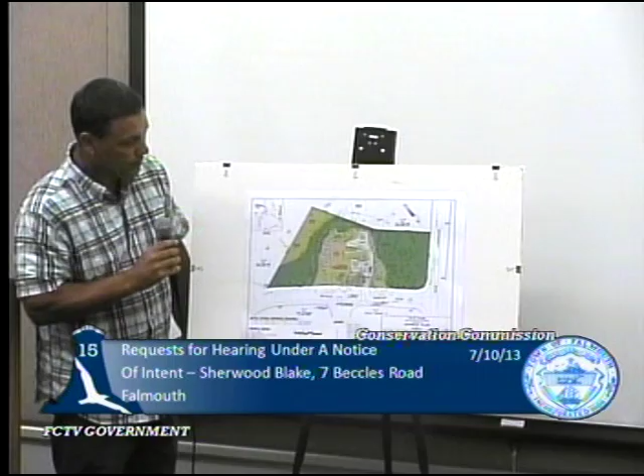We've submitted a notice of intent application for permission to repair two failing septic systems on the property at 7 Beccles Road. 7 Beccles Road is at the corner of Sippewissett and Beccles Road. The lot contains a single-family dwelling and all the typical appurtenances you'd expect with a single-family dwelling, including landscaping, a driveway, patios, things of that nature.

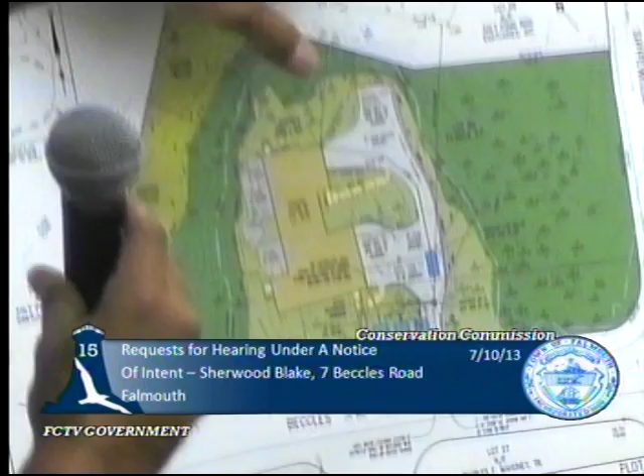It sits on the center of the lot, on the highest elevation on the property. Off to the east and north is a bordering vegetated wetland that was delineated by Vaccaro Environmental Consultants. There's a sloping landform around the property that meets the definition of a coastal bank. We've delineated the top of the coastal bank on the plan as well.

The property is under agreement for sale. A septic inspection was performed, and it was discovered that the property is served by two septic systems, both of which are in hydraulic failure.

The first one is located in the position that I'm pointing to here with my finger, and it's a cesspool. It's basically located about 20 feet from the top of the coastal bank and about 40 to 45 feet from the BVW. And it serves a portion of the plumbing within the house.

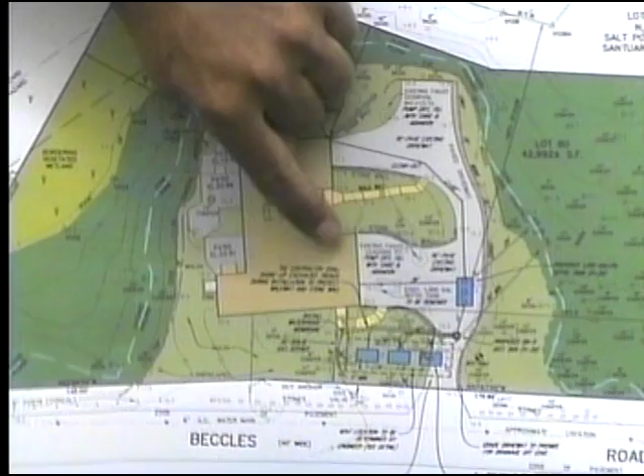The other septic system that is also in hydraulic failure is under the driveway in this location, and it serves the balance of the plumbing in the house. It consists of a 1,000-gallon septic tank and a leaching pit that's in hydraulic failure. The tank is undersized by today's standards - the minimum size is 1,500 gallons. Only a portion of the flow actually goes to the septic tank; the rest goes to the cesspool.

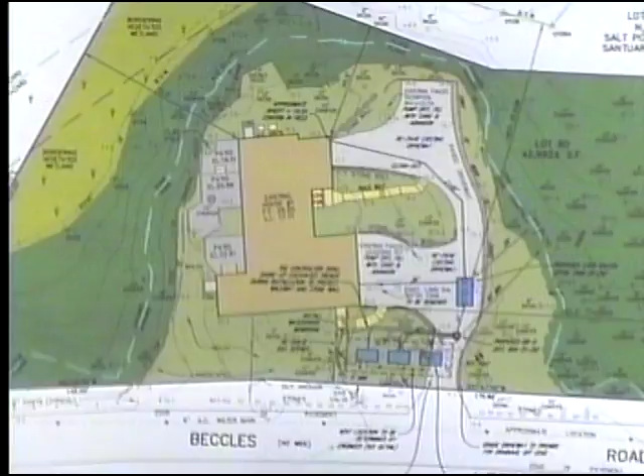Typically you would see a septic upgrade under an RDA application because it's something that I think the Conservation Commission would welcome getting repaired. There's no proposed alterations or improvements to the house. There's no proposed increase in septic systems.

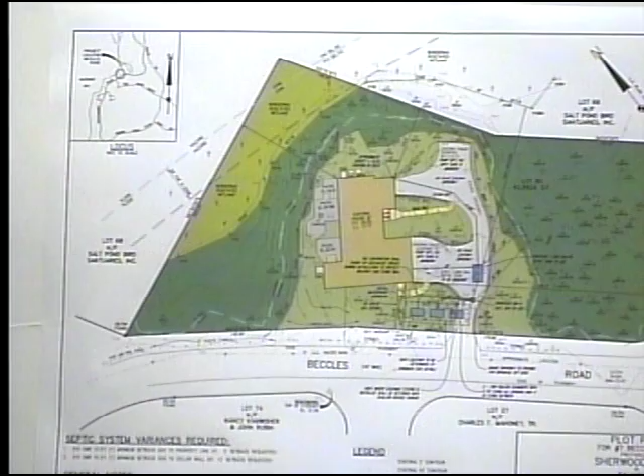The reason we filed for a notice of intent is because we went on site with Mark Hasbisick, your agent, and we talked about the close proximity to wetlands and the fact that the driveway will have to be dug up and repaved, and there seemed to be enough work close to a wetland resource that conditioning is probably appropriate. So a decision was made to file a notice of intent instead of an RDA.

So the proposed work includes abandoning these systems in place, pumping them dry and filling them with sand. The pipe that leads to the cesspool will have to be rerouted, and the idea is to excavate a trench down the driveway over to a place where a new septic tank will be installed, in a location that makes sense with the plumbing that exits the house here.

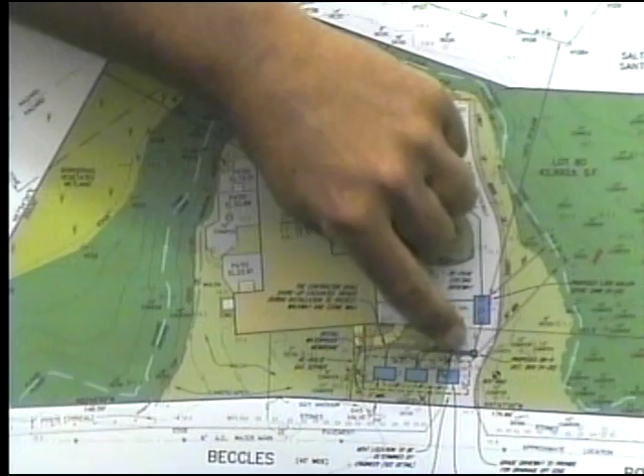So the two pipes that now go to separate systems will be piped together into a common septic tank, then piped to a distribution box, and then piped to a leaching field. The leaching field has been placed as far as possible from the wetland resources. In this case, the closest point of the leaching field to the top of the coastal bank is 50 feet.

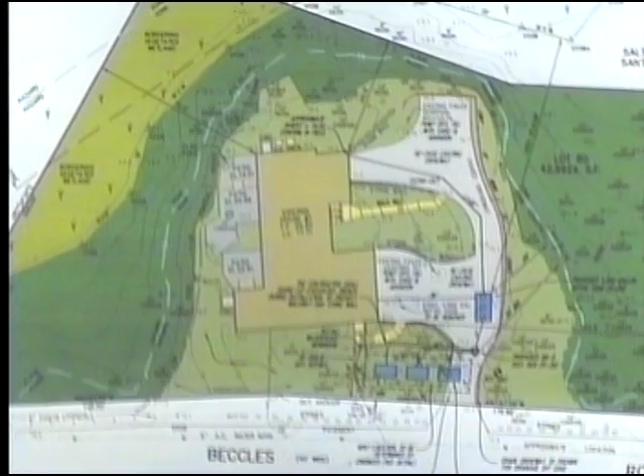There's virtually no other place on the site to put this that would really increase that setback. So there'll be some minor excavation and then repaving to install these components. There's some landscaping features between the house and the road that will have to be removed and then replanted after this is installed. We've put a note on the plan that says the landscaping shall be appropriate for landscaping over a septic system, with shallow-rooted plant materials.

So we're pretty much up against it here without a lot of options, but certainly this is an improvement over what's there today, with both systems in failure, and certainly the cesspool being very close to the wetland and the coastal bank here, and this leaching pit being closer to the wetland than what we're proposing.

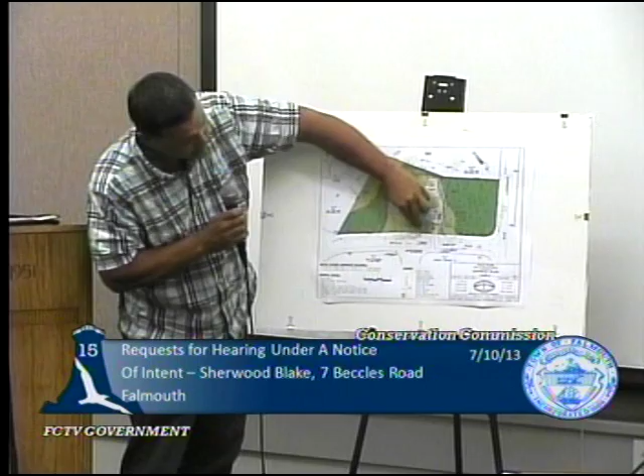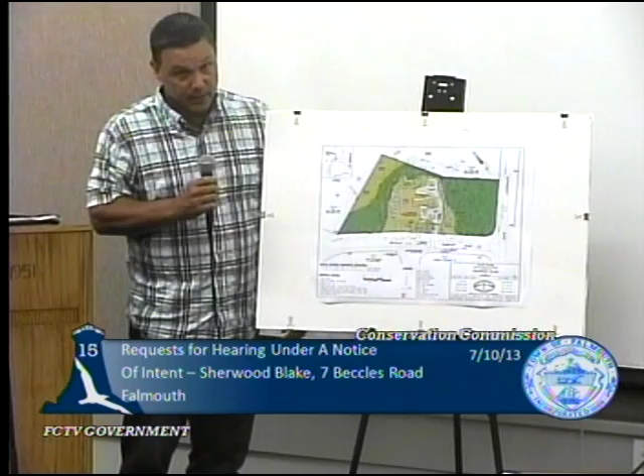The only other thing I'd like to add is we have been to the Board of Health. We submitted the plan, and we need a couple of variances: one from the setback to the street and one from the setback to the house. Both of those were granted, voted and approved. We haven't received a written document, but they had a meeting a week ago Monday and voted to approve it. With that, I'll be happy to answer questions.

Thanks, Mike. Jen? Yes, Madam Chairman. Mike, two questions, well, one comment, one question.

One request: BVW data sheets. I'm tired of hearing myself ask for them, so anytime there's a BVW project, just submit the data sheets as part of the application. I thought they were submitted. I thought we submitted them after the fact. I thought you asked for them when we submitted. Didn't get them. Just resubmit them, because I'm happy to do that.

And you say we went to the Board of Health, because I pulled the assessor's records on this and it says it's a 3-bedroom. So if you have any documentation, because you're proposing a 5-bedroom system, but the assessor's records have it as a 3-bedroom house. So our regs would call that an enlargement of the system, which means you would have to overcome the presumptions of significance.

Sure, I can speak to that. Well, next time provide some information if you can. I'll speak to it tonight.

We discovered that discrepancy. We did a walkthrough with the health agent, well before we developed the plan, because we found the same discrepancy. The health agent walked through the house with us and agreed that the system should be designed for a 5-bedroom, based on the number of bedrooms that were in the house.

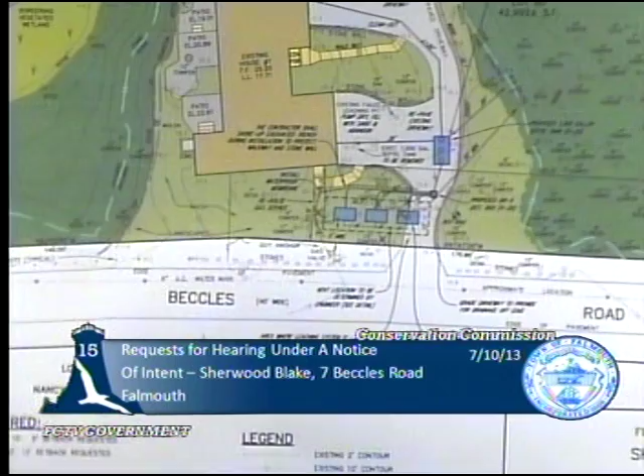I think once this is all done, it's gonna be better. My only concern, and probably theirs too, is that they're gonna lose all those beautiful pine trees in front, and you can't replace them. There's a couple you're keeping, I see. We did our best. We're hoping the dogwood on the end that was showing to be removed - we're gonna try to save it. No, it's a cherry I think. Mature cherry, we're gonna try to save it, but the pines, there's no way around it - the taproot on the pine, you couldn't possibly put it on top of that.

Mike, when you come back, can you give us a plant list of what you're proposing to put over that leach field? I will do my best. The buyer has very specific ideas about how he wants to replant that, so we're going to have to coordinate with him and maybe get you a plan that shows that. Oh, that's fine. To have a continuance? Yeah, but we don't have a date yet, so let's discuss that first.

A date - Mike, how long do you think you'll need? When do you file this with Natural Heritage? The 25th, same day for us. Let me see when that's gonna kick out. I don't know that we will hear from them. Yeah, that's what I was thinking - we could put you on for next week, because it seems like we could try for it, but I don't know if we'll hear from MESA. We'll try to call them and pressure them to respond. MESA has until like the week of the 22nd.

Not the 31st? Oh, sure. If you want to try next week, Mike, we can put you on if you can get me that information. Why don't we try - if it comes through, it'll be quick, and if we don't have it, I'll just request a continuance until the 31st. That's fine, because you're not meeting on the 24th. Correct, that's fine with me.

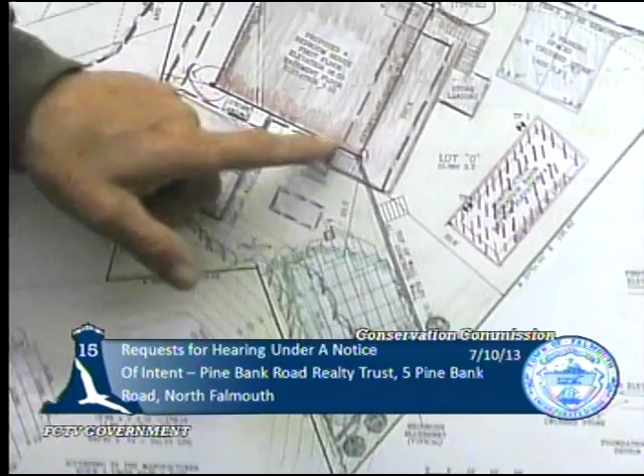The original footprint, shown as a brown dashed line, is in this location with the deck. We are shifting it so it now complies with zoning. Instead of being 4.7 feet from the sideline, we are now going to be 11.4 feet. So we are literally taking the house, knocking it down, but putting the replacement approximately 5.5 feet further east.

We're doing so for a number of reasons. One is compliance, two is so they can have a little more privacy here. Those really are the major reasons. If you look at our notes, you'll see the actual proposed lot coverage is reduced by 0.4%.

However, in order to build this house and get it to comply with Title V present-day standards, we had to propose an elevated system in the back. What we intend to do is raze the existing house, remove it, and rebuild in the same location.

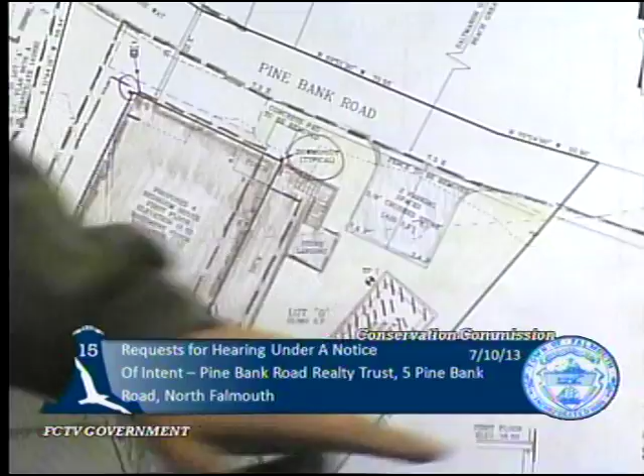We officially show 2 parking spaces when they already park here, but we're depicting 2 here, and we're actually proposing to put 2 more there. This isn't included in our calculations because we're proposing 3/8-inch crushed stone surfaces to be placed on a permeable sub-base and base.

If you've been to this area during a rainstorm, you'll know there's a lot of standing water. So what we've done is tried something a little more unique. When they remove the house, because of the way the foundation's going to have to be built, there's a couple things — one, we proposed a detention area so that if there is pumping, they have a place to pump it.

That detention area is only going to be about 2.5 feet deep because that's how deep it is to the groundwater, so we're going to excavate it out. It's going to be temporary in nature. At this moment, we don't know exactly how the architect proposes to place the foundation, but I anticipate he's going to have to do some dewatering, so we designated a dewatering area. I took the liberty of showing that area because I'm not sure how they're going to accomplish that.

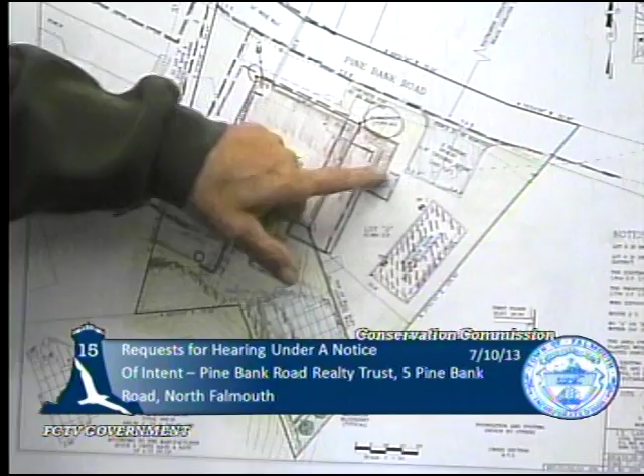In terms of improvements, the house is going to be shifted 5 feet. It's going to have a new landing for the deck and another set of stairs here. We have to do that because it also has to be elevated, being in a flood zone.

The flood zone, I don't show it on this plan, but it is staked in the field. It is flood zone elevation 15, so we had to make the first floor at least 1 foot higher, elevation 16, because of your regulations, and we added a half a foot more, so it's at 16.5.

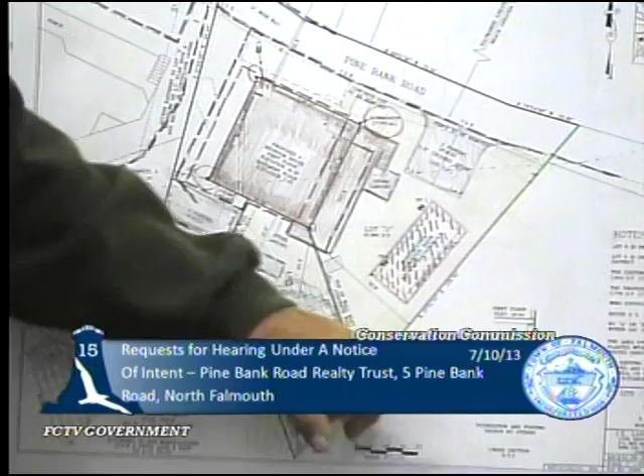Getting back to the drainage, what we propose to do is show conductor pipes at each corner, and the slab elevation is proposed to be at 7.5. We actually have a crushed base put below the slab, so the crushed base is going to be at an elevation of about 6 to 7, and then there'll be anywhere from 4 inches to a 6-inch slab, which brings us up to 7.5. So we're going to drain all the dry wells into that crushed stone base.

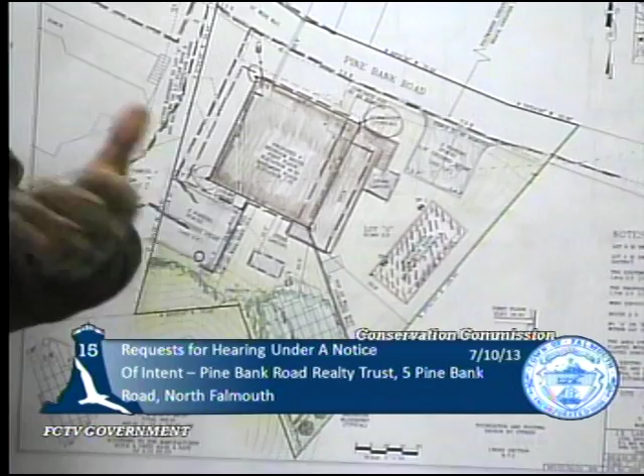It's porous. We have a granular soil, and because we have elevated groundwater, at about elevation 5, we really don't have any place to put a deep basin because we'd be in the groundwater. So what we intend to do is remove any organic material, go down to the coarse granular sands that we encountered, and fill it back with either crushed stone or a sand and crushed stone combination. The dry wells will be directed to underneath the house.

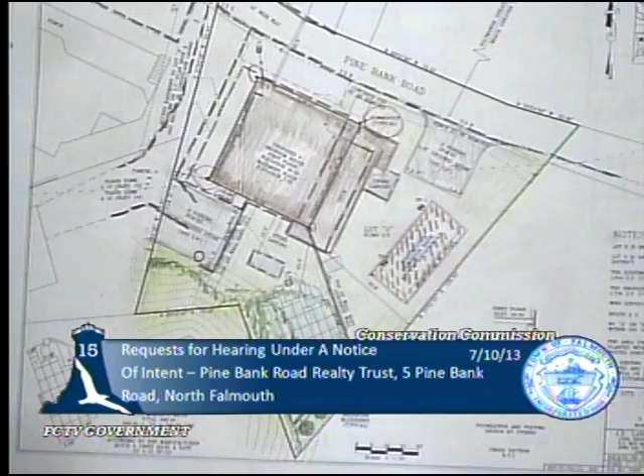Very much like you might see on many parking lots, where they actually have chambers below the parking surface to contain either the first flush or the increase in volume of material leaving the site because of the man-made improvements.

I probably skipped over the most important part, and that is the resource areas. We're greater than 300 feet away from any vegetated resource area. In fact, I think the only regulation that triggers us coming here is we're in land subject to coastal storm flowage, and we're near a coastal bank.

However, this is almost an opposite scenario. I've never seen anything quite like it. The top of the coastal bank is back here on someone else's property. We're virtually working below the top of the coastal bank for this entire project. Because of the site and the elevation of the groundwater, we are actually proposing the SAS be placed at the toe of the bank.

Because the groundwater is so high, we've proposed a retaining wall to retain the SAS. The way we've designed it, we don't need any variances from the Board of Health. We're 5 feet above the groundwater. We're greater than 10 feet from the property line. It's all gravity flow, but as a courtesy, we are taking it to the board for commentary. We don't believe there's any requirement. Because the house is so high, it's going to be gravity flow to the tank, then to the field.

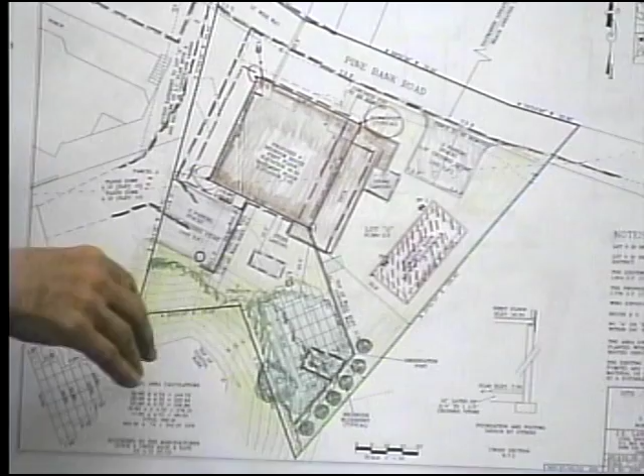And the reason we embedded it into the bank - do you have finished grades done? Do I not see finished grades on there? Well, it shows the top of the proposed wall at 11.5. So that's your finished grade. The actual ground is around elevation 7 to 8. So you're going to have a wall somewhere between this high and this high, depending - if you're at elevation 7, it'll be this high, if you're at elevation 8, it'll be a foot lower.

So you're proposing to raise that grade all through from the end of the stone wall where your high bush blueberry are to the concrete wall near those parking spaces, and raise that grade 3 to 4 feet in that entire area? Yeah.

We feel we're gonna need fill calcs for that, Jack. I realize that. I know what you're looking for. I just didn't provide them. That's a lot of fill. It's like the BBW sheets - every time you're filling, we're gonna ask. We'd rather have you provide it, rather than us having to ask.

I completely understand. We do like the fact that you provided the basin for the dewatering, although when it comes down to the construction of this, we're gonna need a much more detailed dewatering plan from your contractor prior to going forward. Yeah, that'll be a condition. You don't need to understand that now.

This was rather dynamic. The architect is, I think, still a little bit behind on that, but we had actually talked to the contractor, and the contractor spoke to the architect about different foundation designs, because I was toying with the idea of pile-driven, which would require dewatering. I was thinking that too. But there's so many issues the architect has to reconcile. So I took the worst case and said we're going to dewater. So you're proposing some sort of foundation right now and not piles?

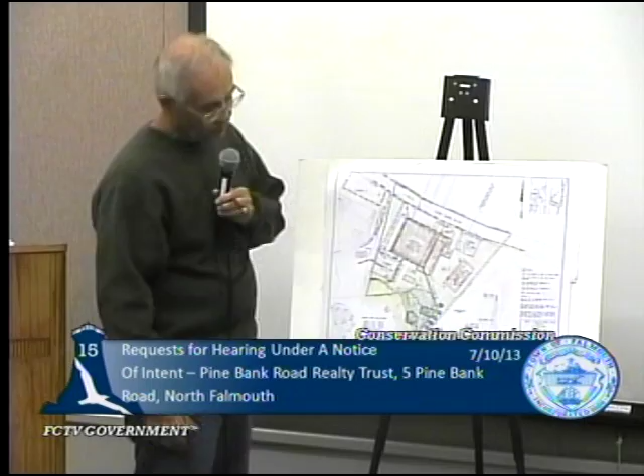Under the entire footprint, there's going to be a foundation system, and the architect's going to integrate it with a concrete slab that ties it in. Directly below the concrete slab, we intended to put a 1-foot thick layer of crushed stone. That is going to be where the water goes from the roof runoff, instead of directly onto the ground where it's highly organic and it'll sit there. We're hoping there'll be a more direct discharge into the groundwater underneath the foundation. Not hoping, it will happen.

Hopefully that clarifies that issue. One more time, Jack, I understand what you're saying, but I think there are a couple of people who have had more experience with that, and we'll see what they think about that.

So what you're telling me is you're gonna put it into the dry well, and the dry well is gonna filter it underneath your foundation? That's correct. That's just what he wanted to make sure I heard correctly. That's correct.

Mike. Would you like to wait? Oh, wait, okay. No one looks... oh, Courtney, a volunteer.

Are you gonna have a structural engineer confirm the stone design and everything underneath there? Because that's a little puzzling, but yes. It kind of runs counterintuitive. Typically, you wanna get the water away from under foundations, for stability purposes. I understand what you're saying.

The bottom of the foundation's still going to be 3 feet below where that crushed stone drainage area will be. They're going to actually have to build the foundation, fill it, then put a crushed stone base, then put the slab down. But I understand what you're saying, Courtney.

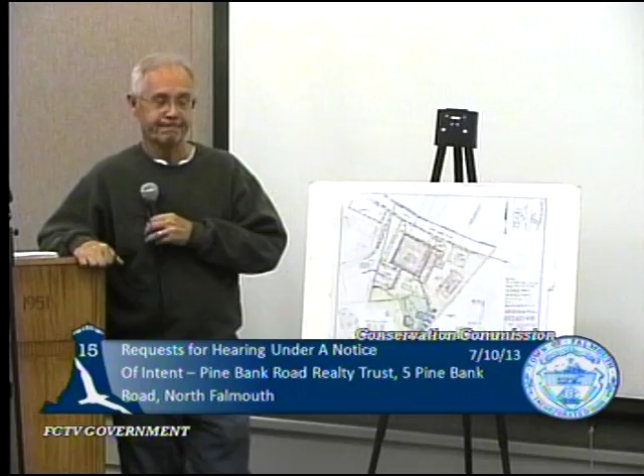We estimated a 40% void ratio with the crushed stone. I can go back and take a look at that, but that's why I chose 1 foot. That's going to be for the engineers, that's the technical end of it. If it doesn't work, it's not my problem. And we really didn't have an effective solution.

You have groundwater 2 feet down. Exactly, and so what do you do? You either let it go across the ground, which upsets everyone because you have puddles there, or you try to do the best you can. In this case, we're creating a waffle of crushed stone that has perforated pipe going through it in order to contain or direct the water directly underneath the house and into the groundwater. Let's get Michelle's thoughts on this. I got it now, I think.

So if something goes wrong and it's below the house, it just doesn't seem like a great idea. Well, the structural stability of the house is not in question because the bottom of the foundation is still 3 feet below that, and that's the structural support of the dwelling.

And I've had experience with this on other basins that are undersized, and what happens is the leader pipe is generally relieved because it's about 1 to 2 inches higher than the actual downspout, the collector system. So if it fails, it bubbles over basically on top of the ground.

What about frost heave issues? Are you worried about water in frozen conditions and high groundwater? Well, typically you want to be a little deeper. High groundwater is about elevation 5, because mean high water is 3.5. And I actually encountered water at about elevation 4.5, and we assumed it's going to be at 5. So we're already pretty high. And the roads, some portions of that road are only at elevation 6.8, so it's a very, very low area, extremely low area.

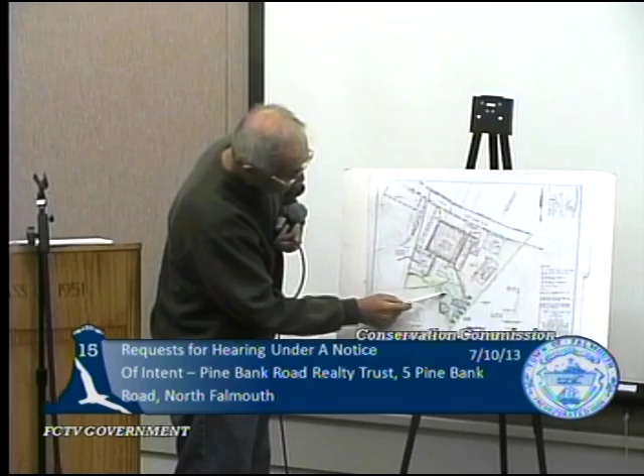So I wanted to show you it's here because it is outside the footprint of the SAS. And here's the existing shed, and it's about 11 feet off that shed. I think when they first saw it, they thought it was on the other person's property because it's a highly irregular shaped lot on the backside. But there is a 14-inch oak, a good sized tree, and it's intended to stay there.

The neighbors that I encountered - because I don't live in that neighborhood, so the stranger was addressed - everybody said hello to me too. They were more than happy to greet me and welcome me to North Falmouth.

Looking at the architectural drawing, at the back of the garage and such, your wall that is going to be integrated into the septic system - I'm just not quite clear on where the foundation pieces are. Is this going to be a monolithic pour? Is that wall literally going to be part of the foundation of the house, or is it going to be separate from it? If you're going to answer, you're going to have to come up.

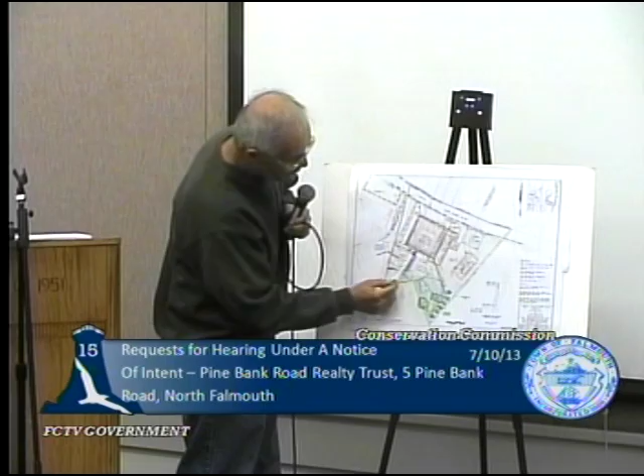First of all, Tom, are we talking about this wall right in here? Yes. Okay, this wall is going to be part of the structure for the house. It's also good because we're greater than 10 feet away, it complies with Title V - doesn't need a vinyl membrane.

I'm looking at this and I wasn't really clear - it's very defined for the SAS on the back, but this is looking to have a traditional foundation. He wants to know how that diagonal is going to tie into those right there. That's the structural engineer's problem - you're going to have steps on all the foundation, different elevations in the foundation itself.

Going back to answer someone's concern, part of the Title V submission requirements is we show the details. We came to an agreement before this meeting that the architectural, structural details have to be provided to me in the next week and a half so I can go to the Board of Health.

But our second page - would you be so kind as to give them to us? Give us a copy as well. Sure, I don't have a problem with that. It's a requirement of Title V, so it's got to be submitted, and I just felt that architecturally, the architect should be responsible for that wall design.

I had a little note here as well - the old pit that's in the backyard, that's going to end up getting yanked out of there, I would imagine. Yeah, that's right, because instead of being abandoned there, it's got to be moved. There's gonna be so much activity, you're gonna be close to footing areas and all that, so I would imagine that just has to come out.

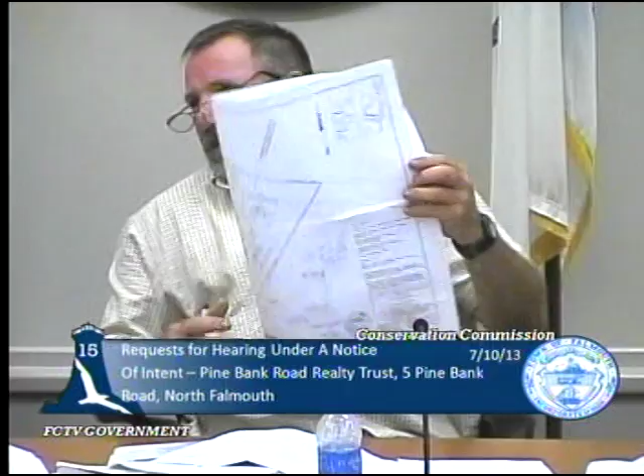And then I got a giggle on this - it says 'what upland side for spoils?' Somewhere on here I read spoils will be stored in the upland. I'm like, what upland? I had a little chuckle, I had to let you know you made me laugh. There is no upland - not on site.

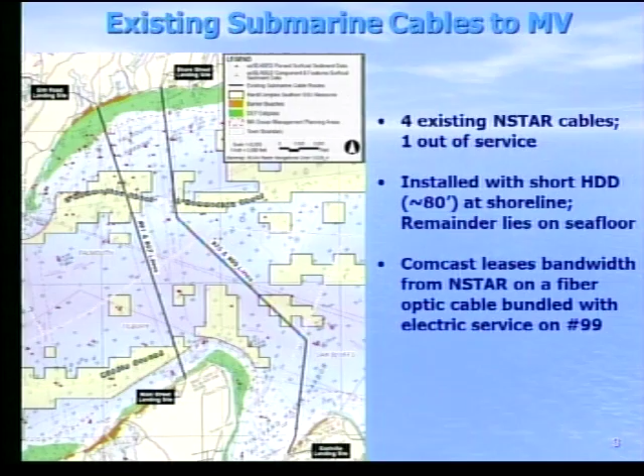Comcast currently leases bandwidth from NSTAR on cable 99, right here. This started out as a Comcast project, and I'll explain how NSTAR got involved later on.

In terms of cable history, cable 75 on the east side has failed and is not operational now. Cable 99 has failed 4 times in the last 15 years. Cable 91 has failed 5 times. Cable 97 is the only one that hasn't failed. So we have a problem here with these failures. Comcast needs to have some redundancy in their fiber connection to Martha's Vineyard, and NSTAR needs to replace the service that was provided by Cable 75 with that outage.

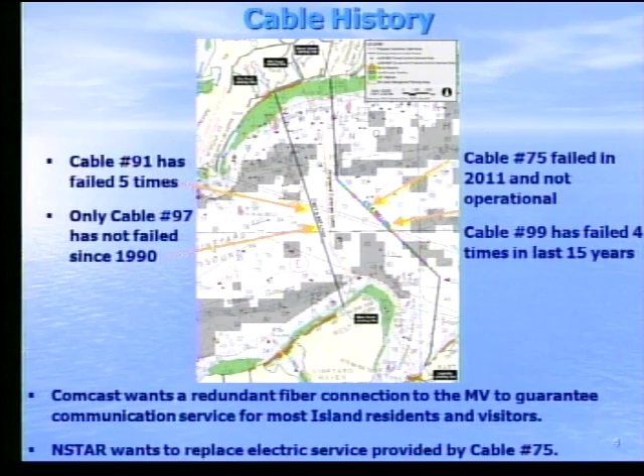The cable route that we selected is right up the middle, from Mill Road going across, avoiding what are known as SSU resources - sensitive, unique resources under the new ocean management plan. For cables, that includes eelgrass, which is the green swath up there along your shoreline, and those pixelated areas identified as hard complex bottom by the ocean management plan. You can see we selected a route that goes through the hole in the hard complex bottom and also down the southern end.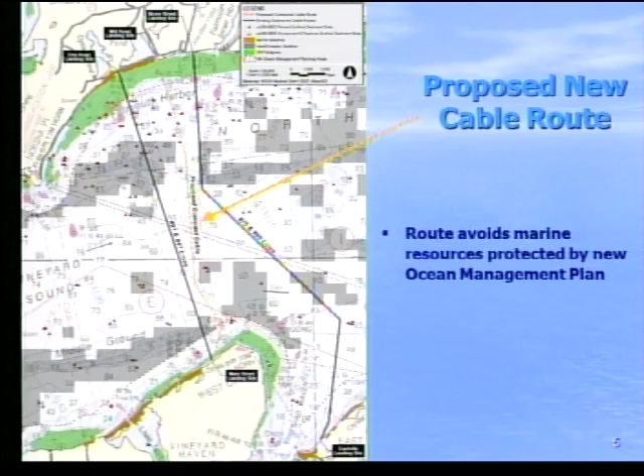The state agencies wanted us to show that hole actually existed, that it wasn't just a relic of their limited data collection. So we did a reconnaissance survey back in May of 2011, a day-long survey of bathymetry, side-scan sonar, and video transects, evaluating the route for potential SSUs, the hard complex bottom, and the eelgrass. We confirmed that the route avoids those resources.

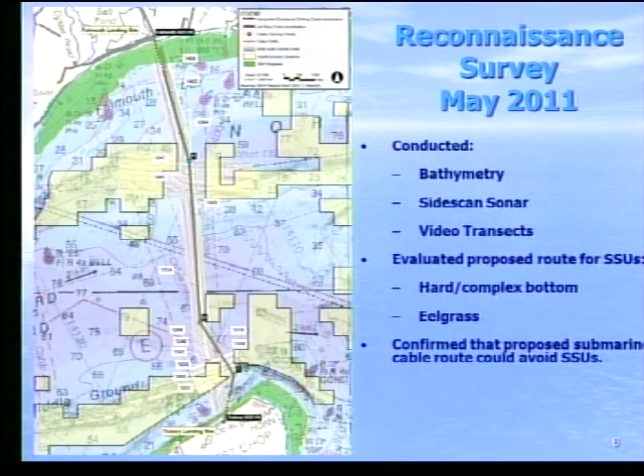The state agencies said fine, go ahead with your next phase of the project, which was basically filing an expanded notification form with MEPA. They agreed with our request to do a single EIR, and requested that we continue to work with the state ocean team on a data collection analysis for the project.

So we put together a very detailed sampling plan involving about a week's worth of survey, doing a 600-foot wide swath - you can see the swath here - with multi-beam bathymetry, multi-beam side-scan sonar, sub-bottom profiling, and magnetometer survey.

In terms of the bathymetry, the multi-beam looks like this image here. It takes the data and processes it into this bathymetry map with a huge number of data points, providing a three-dimensional view of the bottom rather than a single track like a typical bathymetry map. It's a very precise look at the bottom - probably some of the best bathymetry that exists in Massachusetts.

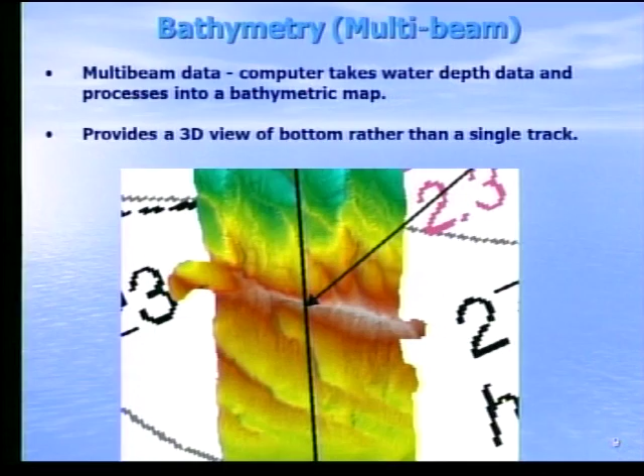Side-scan sonar takes a look at the bottom three-dimensionally. It sends out an image to the side of the ship - the ship is right in the middle here, and it goes out in this direction and this direction, so you see what's on the bottom. We can see the existing cables shown there, a field of sand waves on the bottom, and anomalies on the bottom. We're looking for things like archaeological resources and hazards that the cable might encounter.

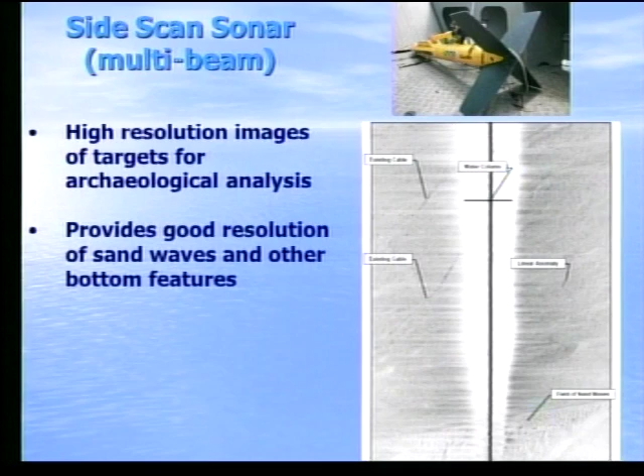We also did sub-bottom profiling, and this is a shot over one of the sand ridges that we go across, with some very active sand movement on a couple of ridges out in Vineyard Sound. You have 5-knot currents out there, so it's very active in terms of sediment transport.

So we can also look at archaeological features that might be buried beneath the surface, presence of hard bottom that might be a problem for our horizontal directional drilling, and basically the geological stratification, which tells us the history of the area. Very powerful information.

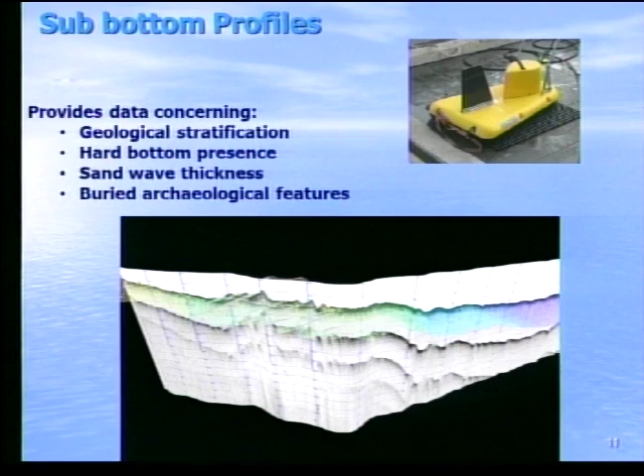We also did a magnetometer survey, which obviously looks at metal objects on the bottom, which is very important for marine archaeological resources.

Next, we did sediment sampling and video transects. You can see the 24 video transects are spaced across here, and then 17 sediment sample locations as well.

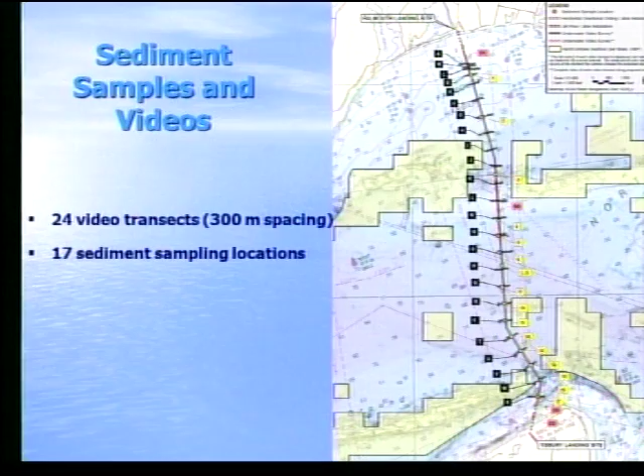What do we find? Underwater video, basically we use that to determine where the eelgrass is along the shoreline. As you probably know, eelgrass changes in location from year to year, so we wanted to pin it down very carefully. We also used it for other types of marine biological mapping and sediment characteristics.

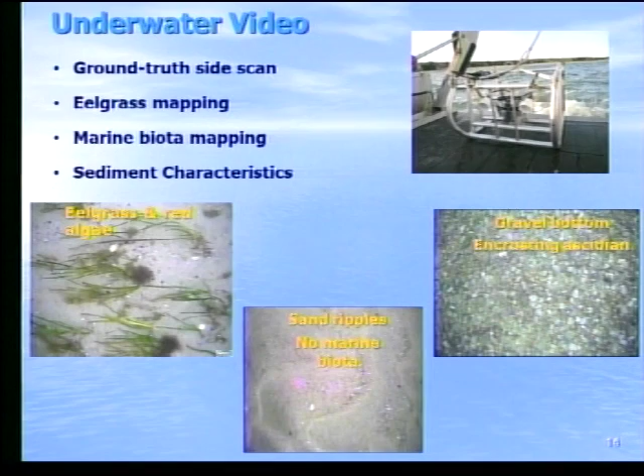We found over those areas that were identified as hard complex bottom, really these were sand waves, and there was really no marine biota over them. We found a lot of the bottom was a gravel bottom with encrusting ascidians, pretty homogeneous bottom, other than in those particular areas.

Sediment characteristics - we did some vibrocoring. Problem with the vibrocoring is the sediment is so compact, we actually bent 2 core barrels. So we did most of our sampling with a grab sampler shown there on the right-hand side. We found moderately well-sorted coarse sands, very well-sorted gravels, scattered cobbles occasionally, and then very well-sorted gravelly, very coarse sands.

We filed a single environmental impact report back in April of 2012 with MEPA. The Secretary found that we properly complied with MEPA, satisfied with 1 EIR.

Division of Marine Fisheries indicated that we don't have any time of year restrictions because of the long horizontal directional drills that we're doing. That's a very unique aspect of this project.

Natural Heritage said basically there were some plovers and least terns that nest over in the Vineyard side. However, since we're doing horizontal directional drilling under their resources, they have no concerns with the project. There won't be any impacts to that habitat.

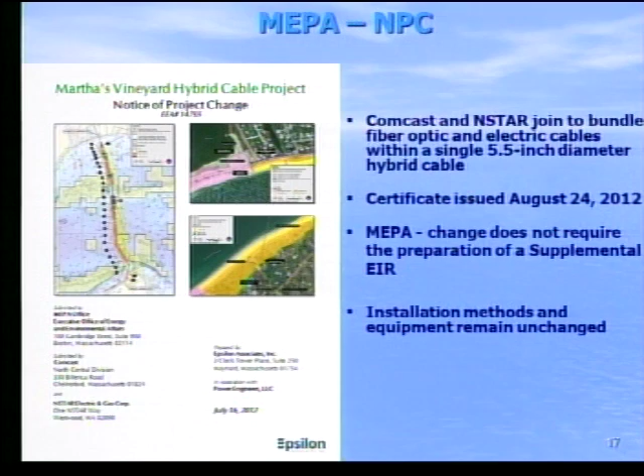Next, we put Comcast and NSTAR together into one single project. So we had to go back to MEPA and file a notice of project change, which we did back in July of 2012. MEPA basically found that it doesn't require the preparation of a supplemental EIR because the impacts and installation methods are pretty much the same.

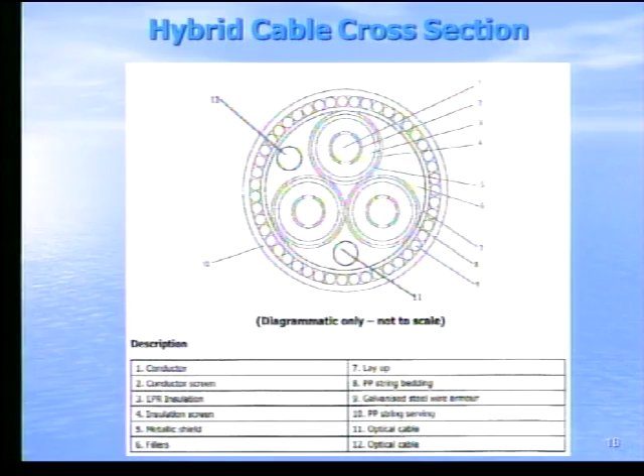So what does a cable look like? It's about a 5.5-inch diameter cable. It has 3 electrical conduits and 2 fiber conduits, and then the rest is basically to protect those conduits.

Okay, let's get to Falmouth. We're working at the town parking lot here, the corner of Mill Road and Surf Drive. We're going to be putting in a horizontal directional drill pit here.

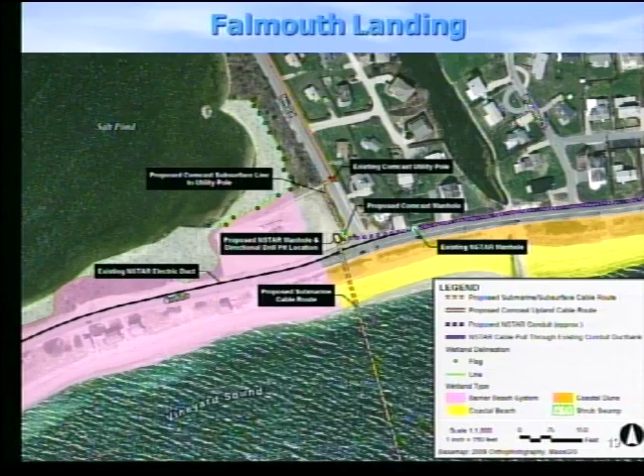We'll be connecting to a new pit that we create over here, a new manhole that we create for Comcast over here, and they will connect over to an existing riser pole on the other side of Mill Road. Then NSTAR will connect over to an existing NSTAR manhole that's basically part of the electric system along the north side of Surf Drive. So the only 2 things you'll see after the project goes in will be those 2 manholes.

Shoreline change - we looked at that in terms of resource analysis. Pretty stable shoreline. The presence of a groin has compartmentalized the shoreline. Not too much change here.

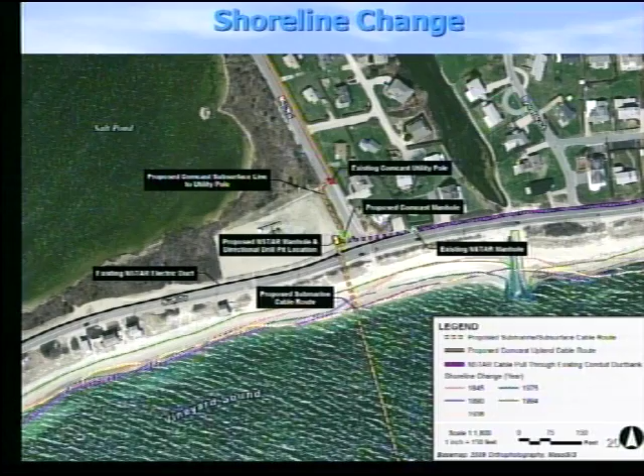You see, after the storms this past year, you see overwash. We didn't see any - little bit of wash over here right at the walkway. These dunes really kind of contained the ocean water during those storms. Most of the overwash occurred down here where some of the houses are on piles.

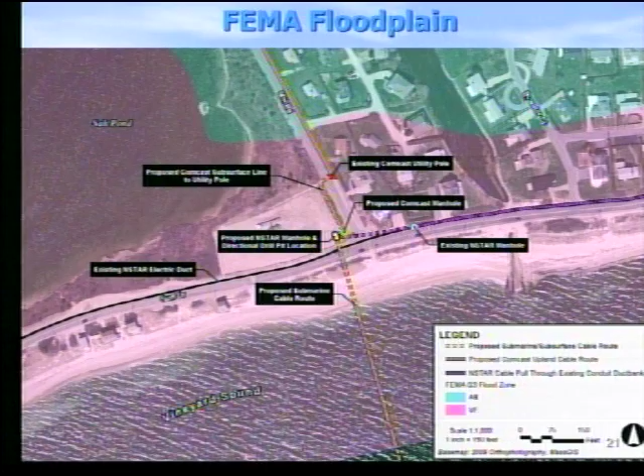We are in a floodplain, but we're not doing anything to harm the floodplain, nor will we be harmed by the floodplain. We have existing cables out there, as I mentioned.

Engineering plans. This kind of schematically shows where our plans are. This shows both a plan view, and you've already seen that schematically, of our horizontal directional drill pit. Shows also a cross-section view, where we're going out underneath the road, underneath the dune, underneath the beach, about 20 to 30 feet below the ocean bottom.

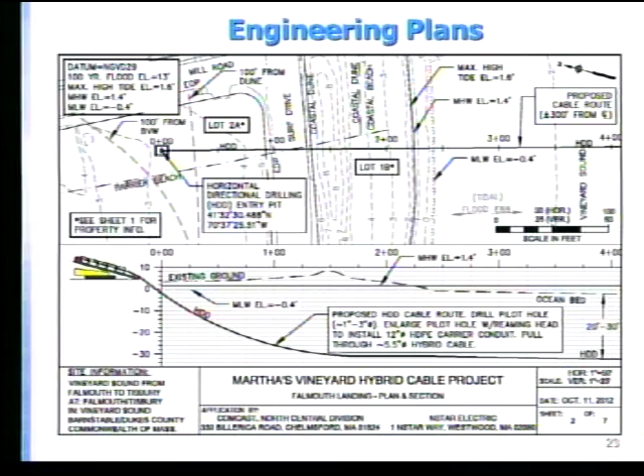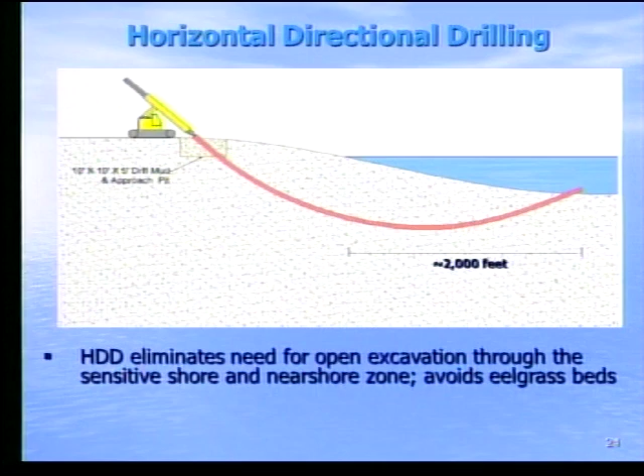Here's schematically what the horizontal directional drill looks like. Here's the pit, goes down like that. And here's schematically how it works. First you do a pilot hole, that's about a 1 to 3 inch pilot that gets drilled out.

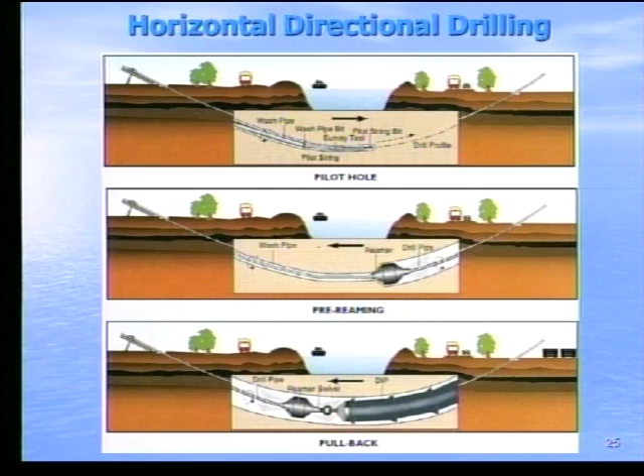Obviously we have ocean out here, we don't have another landmass. After the pilot is advanced, a reamer is put on the end of the string that's pulled back through the hole and enlarges it to the point where you can pull conduit through. We'll probably either have horizontal HDPE, high density polyethylene, or steel cable for our conduit.

Then once we're out here, the horizontal directional drill is out about a half mile, so we're avoiding all those coastal resources. Then we do trench and burial. Unlike the other cables that are out there that are spliced together, this is one single cable, 4.5 miles long, 300 tons.

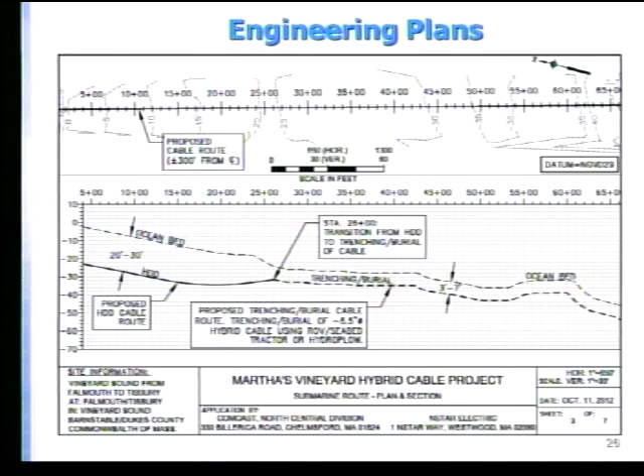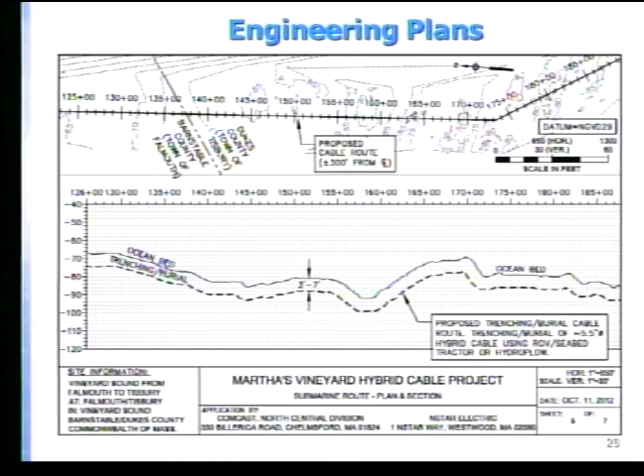We continue out, going underneath middle ground, and then we come out to the border of Falmouth with Tisbury right here, at 13,500 feet.

Okay, what happens in terms of the burial? We have a ship out there. It's going to be attached to a hydroplow, one technique that could be used, which simultaneously buries and lays the cable under the seafloor.

Or it could be harbor master units on a barge. Harbor master units are basically big outboards. They usually have them on both stern and bow of the barge, and they're controlled by something called a dynamic positioning system, basically a big computer that controls all four of those harbor master units.

And you need this out here because, again, we have 5-knot currents. The alternative for that is big anchors, what they call kedging along the bottom. The state agencies didn't want that because of more impact to the bottom, so we're going with this dynamic positioning system.

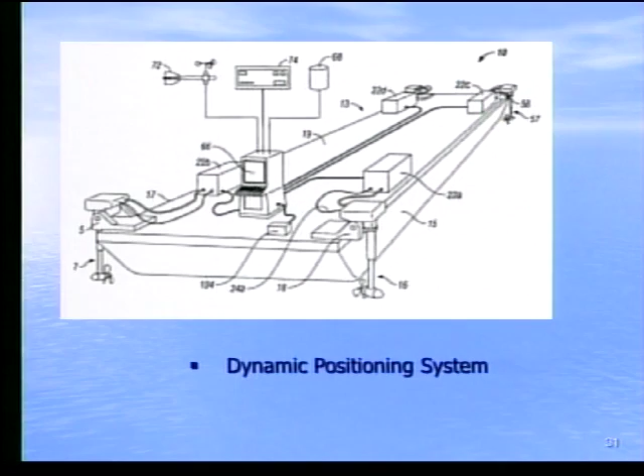Type of units for installing the cable would be a hydroplow that has a long unit on the bottom. These are all fluid injections, which inject water into the sediment, allowing the sediment to part and the cable to basically sink down into that hole that's created.

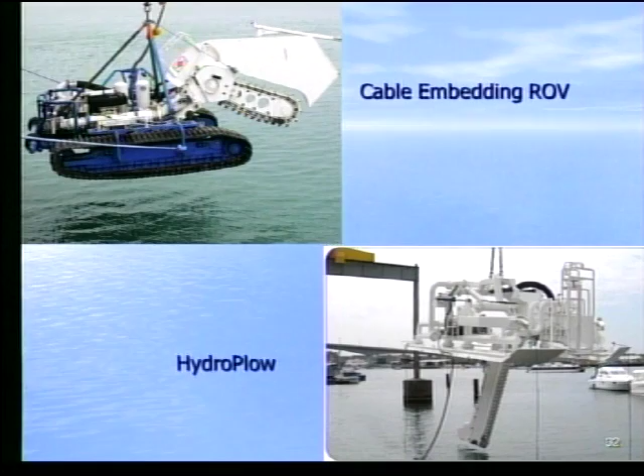Or through some of the coarse grain sediments, they have these units that look like a big chainsaw. It actually cuts through the coarser sediment.

Okay, over at the Falmouth landing, again, we talked about the directional drill pit. That will eventually become the NSTAR manhole. We talked about the Comcast manhole right here. Talked about trenching over, going under the road, connecting to the existing pole for the Comcast, and then going over to connect to the existing manhole for NSTAR.

In terms of the notes here, I mentioned the only two permanent ground-level changes will be the new manholes. Obviously talked about horizontal directional drilling to avoid impacts to the dune and beach. No new utility poles. In terms of other impacts, work lights will be shielded and equipment will have noise abatement measures. Drilling will take approximately 1 month, and construction will be conducted according to the town of Falmouth regulations governing construction hours.

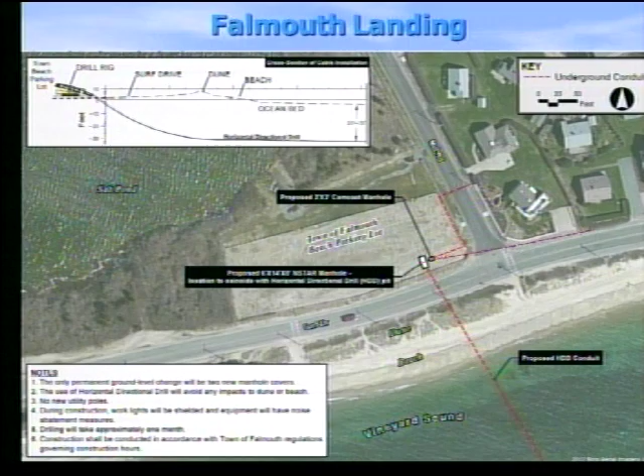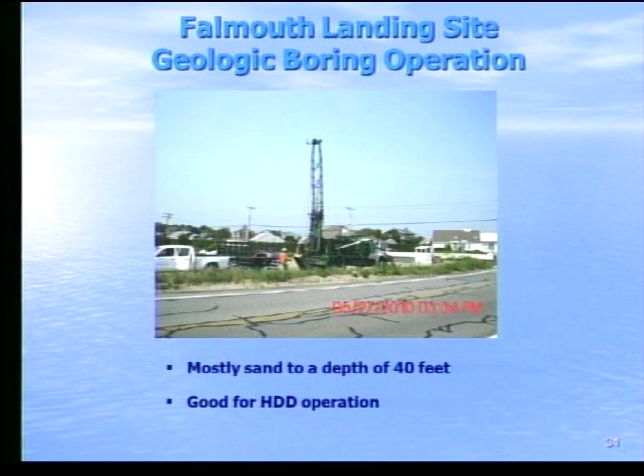Okay, we've already been before you with an RDA for the boring that was done. The boring found mostly sand to a depth of about 40 feet, which is good for the horizontal directional drilling. The drill mud, which sometimes is of concern, basically is used to bring back the cuttings. It's also used to lubricate and cool the drill head and seal and maintain the stability of the drill hole.

The mud is a bentonite, which is a montmorillonite clay. Clay expands up to 15 times. They're packed together as layers like this. When water is added, they expand. If you live down south, you know it, because a lot of the soils will expand down there. There aren't too many houses with basements because of the montmorillonite type of clays.

Also, there'll be polymers, which are basically a chemical compound that adds to the viscosity and lubricity of the mud. Polymers are used in ice cream, starches, cellulose, xanthan, and guar gums. Pretty benign stuff. And also water.

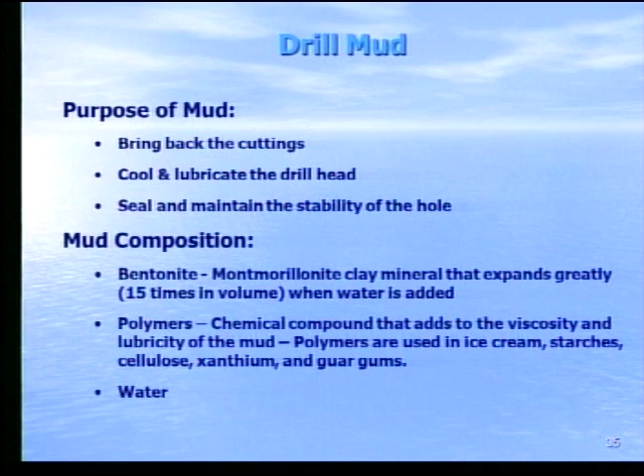I talked about minimizing impacts to the neighbors, the abatement measures that we already talked about. And that's pretty much it.

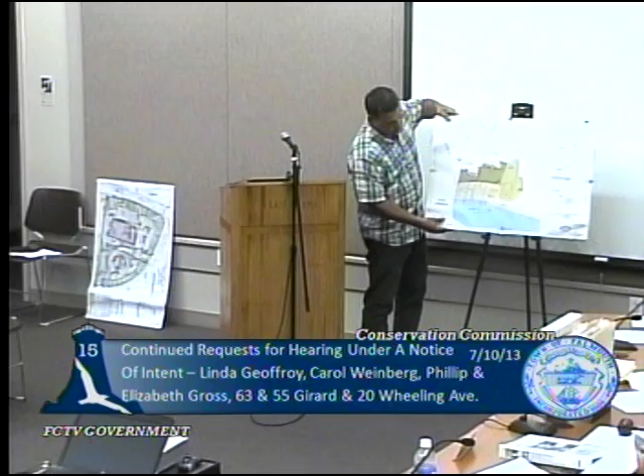We originally went through the project in fairly great detail. We listened to issues and comments raised by you, and made revisions to the plan subsequent to your comments and meeting with Jen. We submitted 12 copies of revised plans on July 2nd.

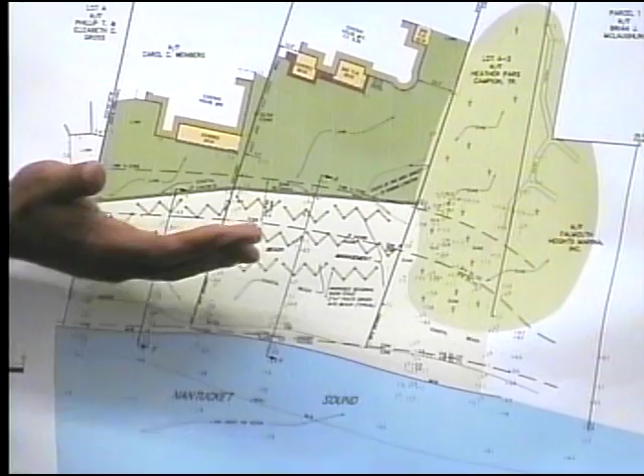The plan revisions we made specifically are: number 1, we removed the solid fencing that was proposed along and adjacent to the existing concrete wall, we completely eliminated it. We adjusted the spacing and configuration of the sawtooth snow fencing in 2 ways: by creating gaps in between that are staggered from row to row, and also by shifting them further landward away from the tidal zone, since there was some concern about possibly being affected by wave action and storms.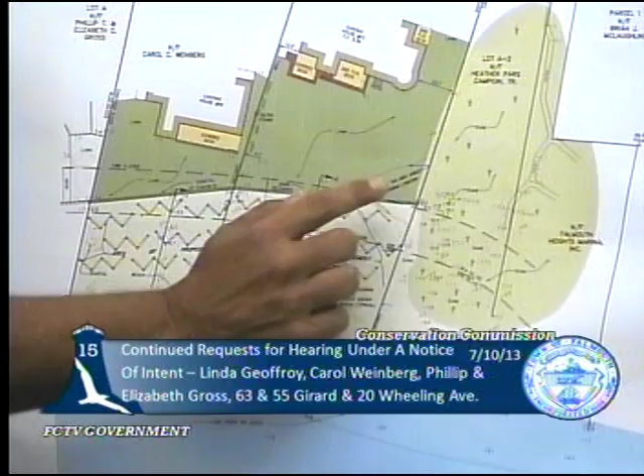We also modified and checked the area that we're calling the area under pending litigation, so that it very precisely matches with what the plan from 1992 showed as the boundary of an area designated as a dune. And that's all the changes.

I think that in the original hearing there were no other matters raised. Oh, there's one other one: we modified the notes on the plan so that all the spreading of the sand will be done by hand, there'll be no machinery needed to do it. I guess that's a pretty important one. So the general notes reflect that. Okay, we expect it to be a condition.

Okay, thanks Mike. Are there any questions? I guess, Michelle, you don't have... oh, I'm not on the quorum. You're not on the quorum. Jen, you had a question?

The only thing is, Mike, I'm glad you guys did everything I asked. I only asked that the snow fencing, and I remember talking to you and Brian, stay off that boundary until that whole thing is cleared up. Since it's still on the plan, we'll just condition that all the snow fencing stay at least 30 feet off that boundary, just till the litigation clears up and we see where we're at.

And the only other thing is that I know the Grosses are no longer a party to this. You and I had that discussion the other day, but they are going to come forward with the restoration of that dune, correct? Yes. Okay, excellent. Okay, any? No question. No.

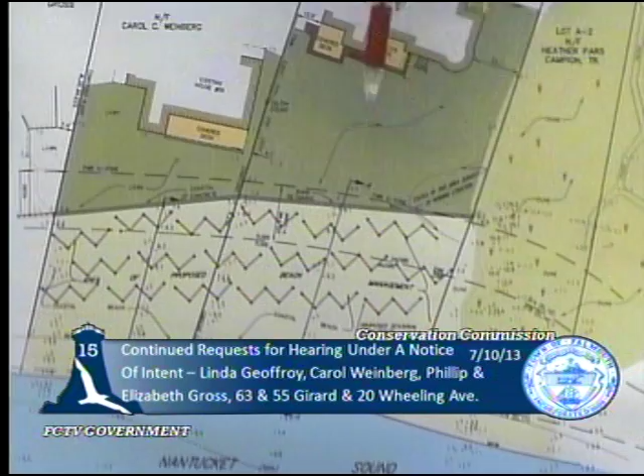And just to clarify, we didn't do that originally to deceive you. We only showed what we thought you were concerned about on the upper side of the wall. We didn't show the area on the other side, but we are concerned with that, and now it's fixed.

I think they've come a long way. I was really glad to see that solid fence taken out along the retaining wall, and so I'm okay with this. No questions.

Move to close and take it under advisement. Second? Okay, we have a motion and second to close the hearing and take it under advisement. Any questions on the board? Any questions from the audience? Okay, all in favor of the motion on the table, which is to close the hearing and take it under advisement, say aye. All opposed? Any abstention? Unanimous, so moved. Thanks, Mike.

Estate of Angeline Caruso, care of Eugene Caruso, executor, 191 Edgewater Drive West, East Falmouth, for permission to construct a new three-bedroom single-family house with attached deck, AC units, to install a Title V sewage disposal system, driveway utilities, native mitigation plantings, and the associated clearing, excavating, grading, and landscaping. Request for a variance under FWR 10.13 from the performance standards set out in FWR 10.185A1A and FWR 10.185A3E.

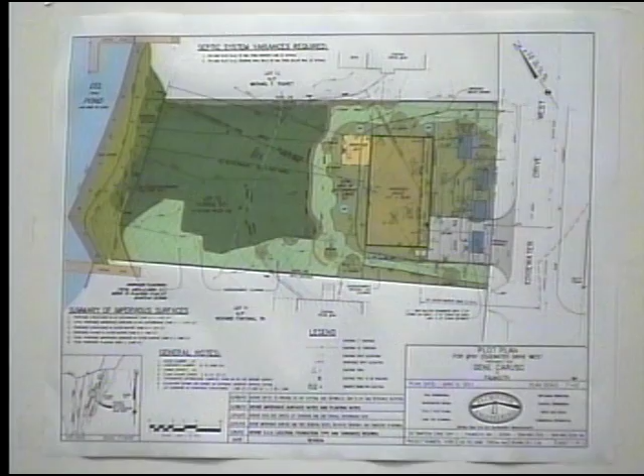And the final, but probably most significant plan change is a change from a traditional Title V septic system to a nitrogen reduction septic system. That change came about based on some additional information that was requested to be submitted to the record that we then read. I think it was Chairman Gladfelder who had requested that the DEP estuary study for the south-facing coastal ponds be submitted into the record.

It's a lengthy document, but we read through it, and within the document, the theme is loud and clear that these ponds are suffering from excess nitrogen loading, and it comes in three basic forms. I think we're all probably familiar with it: fertilizer, road runoff, and septic systems, or substandard septic systems.

So we discussed it with our client and made a recommendation that we could further improve our application if we offered to provide a nitrogen reduction septic system as part of the Title V septic system, to further convince you of how we're doing everything we can to mitigate against your concerns. So this plan now includes a nitrogen reduction septic system.

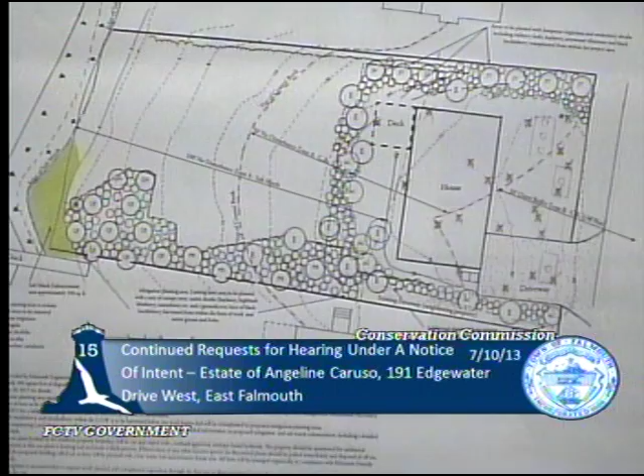So that's up in here and around the house, to improve the buffer zone and wildlife habitat value. So that's just a general overview. I'm happy to answer any questions about the planting plan.

Okay, thanks. That's it for your presentation?

I wanted to say something about the variance. I won't be long, but I think what I have to say is important to our client. The last time we were here, I presented the variance request, and it's in writing, it's in the record—it's about a 7-page long letter, and I would ask that you take a look at that. I'm not going to go through the letter again tonight, but I'd like to highlight a couple of points, and I've got a new argument that I'd like to assert tonight that I didn't assert last time.

The highlights of the variance request—and the Commission's well versed in this—you have to have a hardship to be eligible to apply. And if you can demonstrate a hardship, then there are 5 criteria that need to be met. In the letter, and in my presentation last time, it went through the hardship and the 5 criteria. I'd like to highlight some of the points that I think are important.

Number 1, we submitted aerial photos and some photos taken from an abutter that demonstrate that the lot at issue was altered legally before the adoption of the wetlands bylaw. In particular, much of the alteration was done very close to the salt marsh and to Eel Pond. Our proposal is to replant and restore those areas with the mitigation plantings that Teresa spoke about.

Secondly, we're proposing to restore the degraded salt marsh and add 120 square feet. We believe that the restoration of the salt marsh and the buffer adjacent to it will provide integrity and improve the function of your wetland resource areas. The mitigation planting proposed on the bank will improve the stability of the bank.

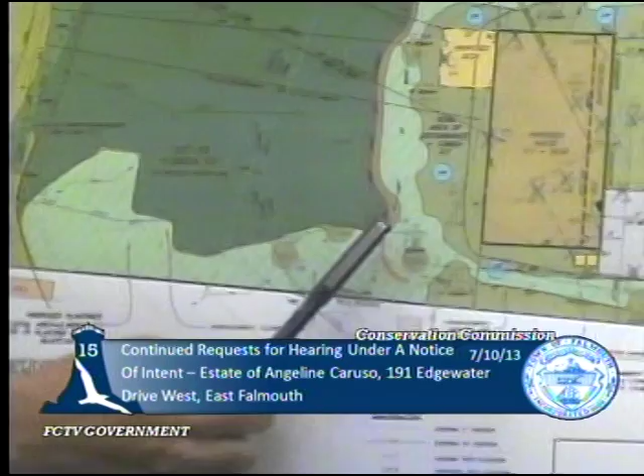So if you refer to your plan, you can see where the wetlands are delineated, the coastal bank and the salt marsh. And then there are the no disturbance zones from the 1018, which is the problem for our client. In particular, I would refer you to this V-shaped line here, which represents the 50-foot no disturbance zone from the coastal bank.

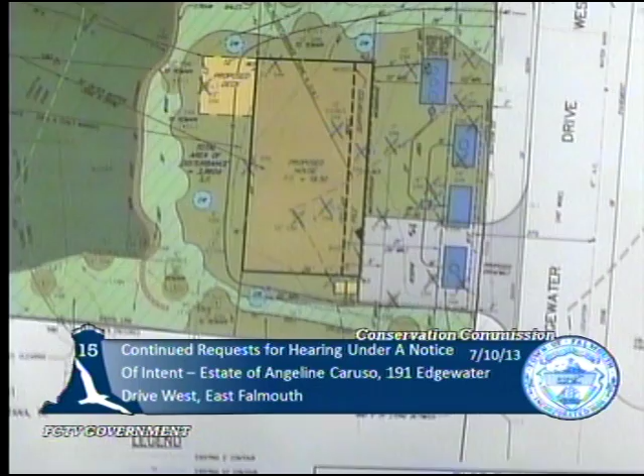This part of the house is in the no disturbance zone. If the applicant attempted to literally comply with 1018, the only area that is outside the no disturbance zone is the inside of this V right here.

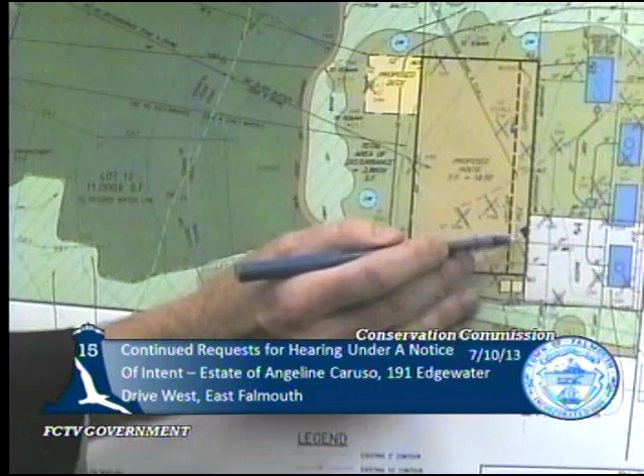The commission has a policy of requiring a setback from the 50-foot when there's a structure. I was here a week or two ago with another project, and the commission made it very, very clear that you wanted to see 5 to 10 feet for a limit of work. If we add 5 to 10 feet onto these lines, the area that could be developed with a structure in compliance with your regulations is this black dot right here, right at the tip of my pen. It's 2.5 square feet.

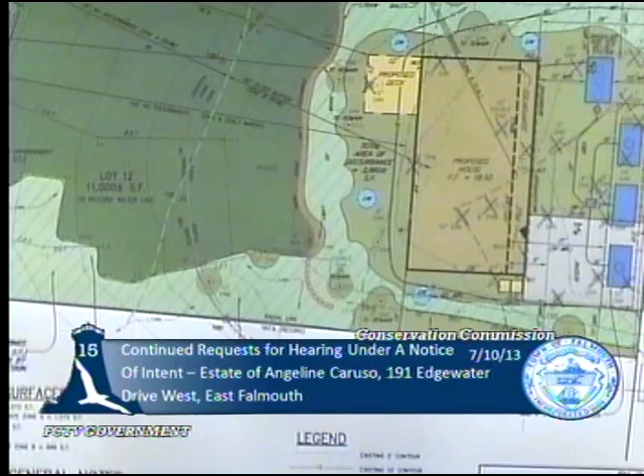That, of course, takes into account the zoning setbacks that are applicable. The structure's 25 feet back from the road and 10 feet from the side lot line.

So again, let me go back to your definition of hardship. When the literal application of the wetlands bylaw to a piece of property, this lot, owing to its unique characteristics, is unduly oppressive, arbitrary, confiscatory, or causes a substantial economic loss, is a hardship. And so our argument is very straightforward.

Application of 1018 allows this person to build a 2.5 square foot structure. That is a substantial economic loss given the background facts, which I talked about the last time, which are as follows. The lot is zoned for single-family development.

It complies with zoning and is eligible for a building permit. It has been owned by the applicant and his parents since 1966, which is 46 years. It's been assessed by the town all of that time as a buildable lot. The taxes have been paid as if it were a buildable lot.

It's currently assessed for $407,000. We're all members of society. I don't think any one of us would pay $400,000 if you could build a 2.5 square foot structure. So we would submit to you that the literal application of the regulation in this case precludes construction of a reasonable single-family home.

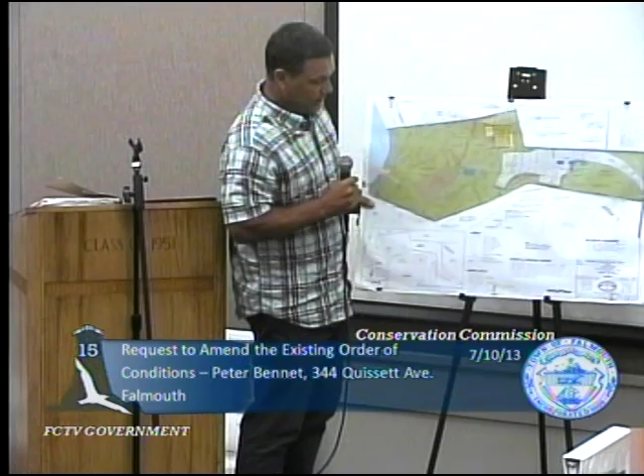The house and existing accessory structure have considerable age, decades, and the applicant applied for and got your permission to raze the existing accessory structure, which was a garage with sleeping quarters on the second story, and rebuild it in basically a similar location. That application also included removal of some pavement and reconfiguration of some parking.

This application does virtually the same thing. There was also a proposal to upgrade the septic system, which was an older cesspool system, and change it to include a pump, pumping up to a leaching field that's outside your jurisdiction, whereas the existing septic system is in your jurisdiction. So we got the order of conditions.

Then there was another regulatory body to go to, the Zoning Board of Appeals. The reason we went to them is because the structure was pre-existing and non-conforming, and by technicality was in a front yard. An accessory structure in a front yard requires review by the Zoning Board of Appeals.

They had some concerns that were sufficient enough that we wanted to reconsider our options, and make it so that while it's still an accessory structure, it's not in a front yard. Bob Ahmet represented the applicant, and Bob and myself went and met with the building commissioner, and a determination was made that if the accessory structure is put in this location, it's not in a front yard.

So you may ask yourself, what's the difference between here and here? The front yard is determined to be an extension of the front face of the building on the street side. So the house in this location is not forward of that extension of the front face of the building. We have an opinion from Eladio Gore where he agrees with that, so that changes the review process.

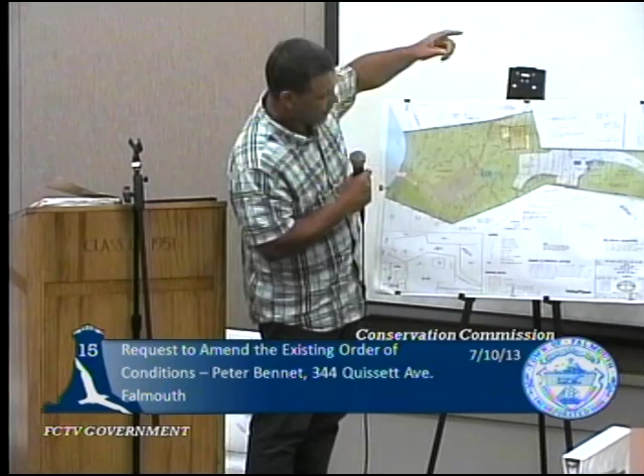There are 2 trees that have to be removed, and they're actually in the outer buffer zone, barely. We're proposing instead to mitigate for those 2 trees by planting, I believe, 6 new eastern red cedars on the property.

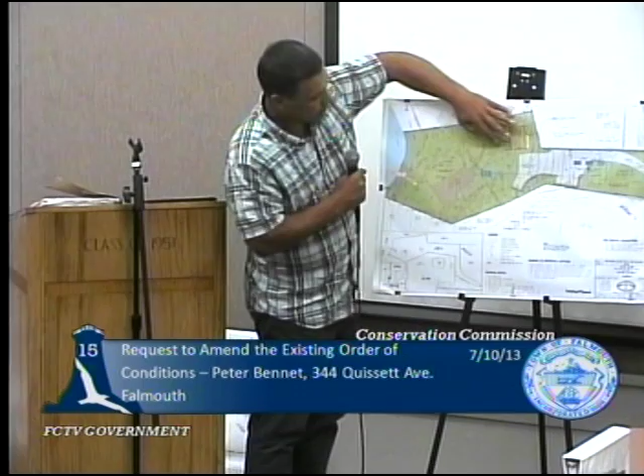The new driveway is proposed to be gravel. There's an extensive area of pavement out here now, so there'll be a dry well to contain roof runoff from this roof. The project was designed so that there's no net increase in impervious surfaces, so there's no requirement to provide mitigation in the form of mitigation plants. The only mitigation proposed is for the tree removal.

And I think that sums up the project. I'm happy to answer questions and see what you have to talk to me about.

Just the way you calculated it, Mike. Two questions before, and I might let Betsy get into that with you. How are you going to get from the driveway to the house?

Just walk on the grass. There's no proposal for a sidewalk or anything, you just park. Unfortunately, Mike, that's great in theory, but we all know that when somebody starts walking on the grass, they're going to want pavers or stepping stones or something else to get them there.

I understand what you're saying, but understand it from my point of view. When we go out to do compliances, we see stepping stones. So once you leave and people come, they start walking across the grass, it's not realistic. Please talk to your clients about that, because I don't know how many times I've gone out and it's stepping stones. This board never wanted to start adding up stepping stones, but it was the engineering community in this town that started adding them up so you could get credit for your reduction of impervious surface. So as I've told you guys many times, you can't have your cake and eat it too.

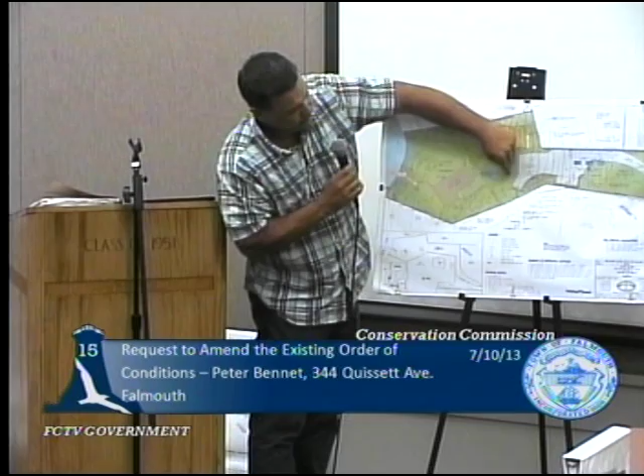There's some other areas that would require conditioning. I'll work with you on a plan. I have some not big places, and I know the applicant will accept those for the mitigation. When I do the plan, I might as well show the footpath if they want a footpath.

That comment was just because it's a reality. When we go out there after you guys are gone and get the permit, do all that, three years later, three and a half years later, we come in and there's stepping stones because people don't want to walk in the grass. Jen was worried about something else and I said no, they're okay. I could have gotten in more trouble, but you're not in trouble, you met the regulation.

Betsy talked me off the ledge.